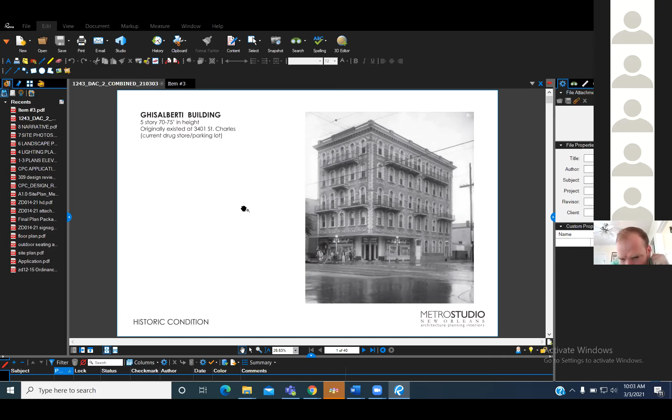We will begin with the presentation of dockets. Item number 2, the reconsideration of Design Review Docket 18420 for a property located at 3401 St. Charles Avenue. We have Renee Duplanche signed up to speak on behalf of this application, and Joseph is the CPC staff member assigned to this case. As I mentioned, Joseph is running a little late, so I'll be sharing the screen, and we will skip the staff presentation—Renee, if you can give us a recap on the comments. You now have 10 minutes to present.

Hey guys, this is Ken Gowland and Renee Duplanche with Metro Studio Architects. We appreciate the comments we received in our initial meeting with DAC. We want to be clear, this project is currently moving through a BZA process for a partial height waiver at the corner. There will be continued development on this project moving forward. As part of that BZA process, we were asked to bring the initial concept design to DAC. The design is different and has been modified to meet ARC requirements. The previous design you reviewed was taller, with a bit more building mass. We held on to the positive aspects of the site plan as discussed in the last presentation.

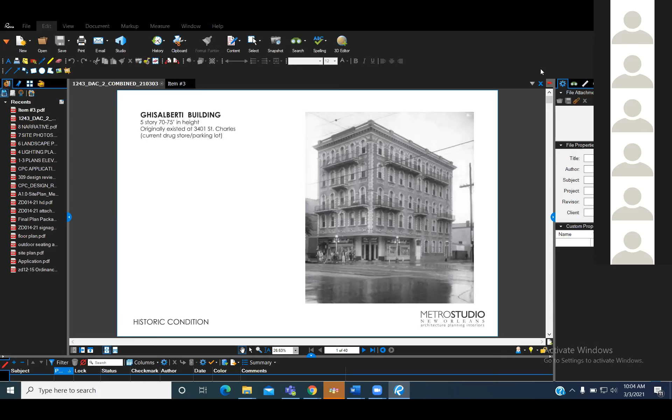So what you see before you now—I think we can skip to page 19 of the site plan. A procedural question: Stephen, this question is for you—this is site plan review only for the DAC, correct? Stephen, are you available? If not, I can answer that question. Okay, Haley, that's fine, that's correct. It's for site plan only, Eleanor, because HDLC has been reviewing the building, correct?

I wanted to add that at the last ARC meeting of the HDLC, the ARC recommended conceptual approval of the proposed design, provided they added ground floor courtyards at the Louisiana Avenue elevation. I just wanted to let the committee know that's where the ARC stood on the site planning of the property. Okay, thank you, Eleanor, for that.

And so Ken, have those ground floor courtyards been added to this drawing, or is that forthcoming? Yeah, because of the timing on the submission, that hasn't occurred, given how the ARC meeting fell with regards to your submission deadlines. So the two areas Eleanor is bringing up are these two insets along Louisiana Avenue where ARC has asked for ground level green space to be incorporated at those conditions. Again, this plan does not reflect that change, because what you have is the same submission that ARC had initially received.

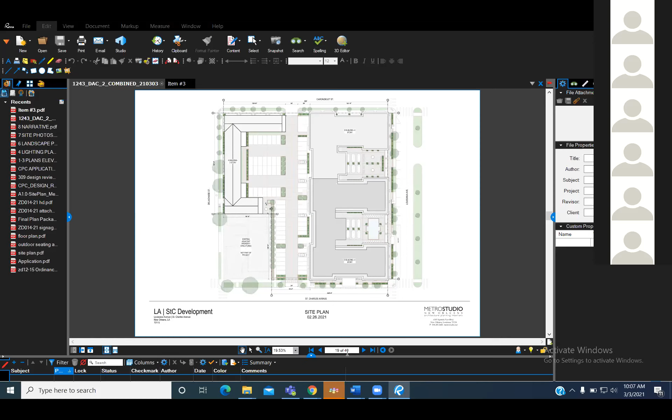Also, if you go to page 29, I think that would be where—so again, that's our existing condition. Sorry, guys, I don't... there. So, page 29.

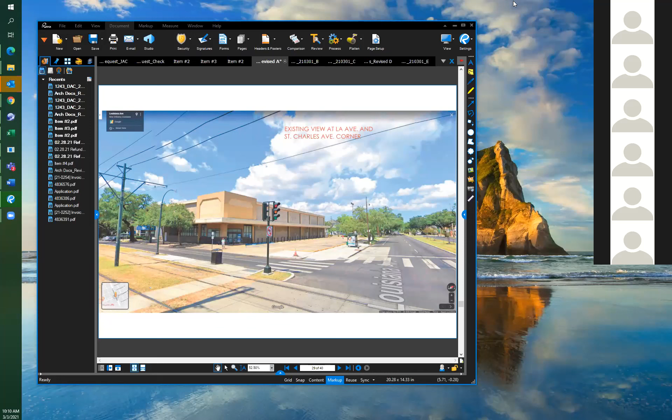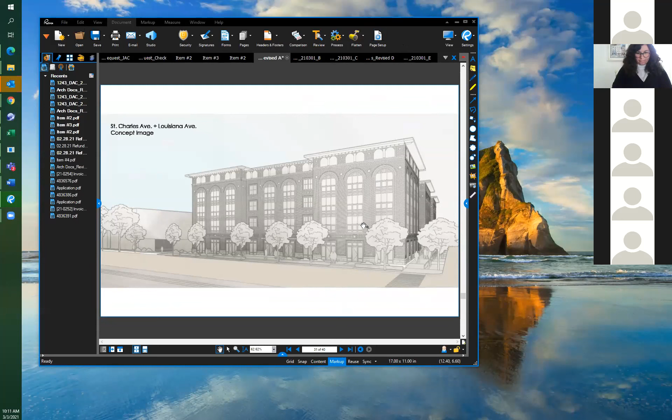Thanks, guys. I just wanted to bring up some other changes in addition to what Eleanor has pointed out. This is our Louisiana St. Charles existing condition. If we scroll to the next page, we can see some of this was the earlier sketch done of the project, a little bit taller, obviously. This was again an earlier concept. ARC had taken some issue with the height, how it was being expressed, and the archways. If we can go forward again, Joseph.

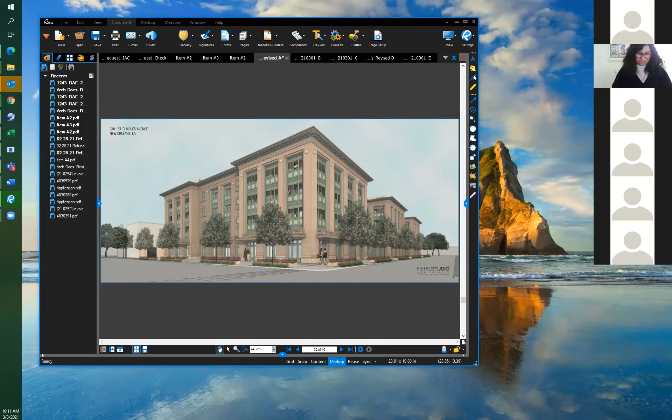This is the revised design as per our last interaction with ARC. As you can see, it's no longer a visible 5-story condition. The 5th floor as per ARC has been set back to reduce any visibility to that upper level. The building now has canopies at all of the ground floor retail conditions, another request from ARC, which we've integrated into the design. The arched openings as part of the facade have been removed for squared off openings as per ARC.

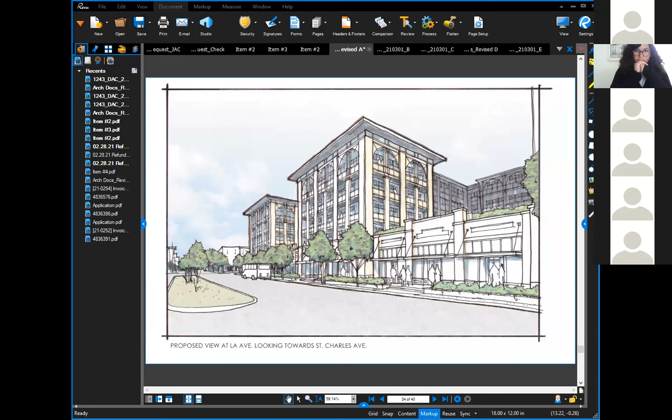We can advance through just to show the progression and the design change. To be clear, guys, the actual site plan, the parking counts, the bike parking, off-street loading, all of those infrastructural components of the original site plan remained exactly how it is. The changes are mainly with the height and the mass of the building. So again, this was the much taller original sketched out design. We can advance through. Again, where we had 5 stories, this is where we landed currently.

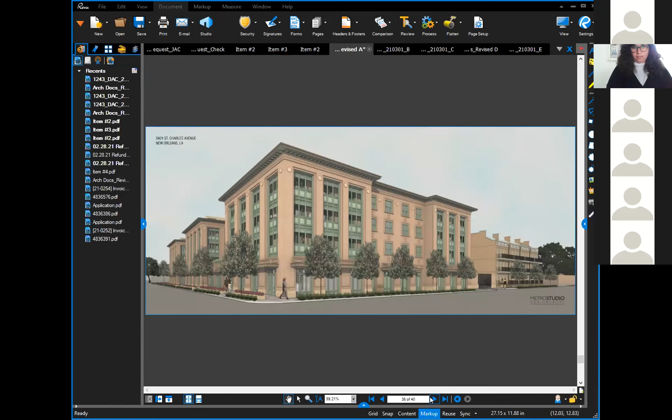This is at Carondelet and Louisiana Avenue. This is no longer a 5-story building. There is no setback 5th floor. The project has been reduced to eliminate the 5th floor at this corner of the site to help us step back into more the neighborhood scale fabric. As you can see in the background, we had our residential building at 3 stories, which is in the neighborhood.

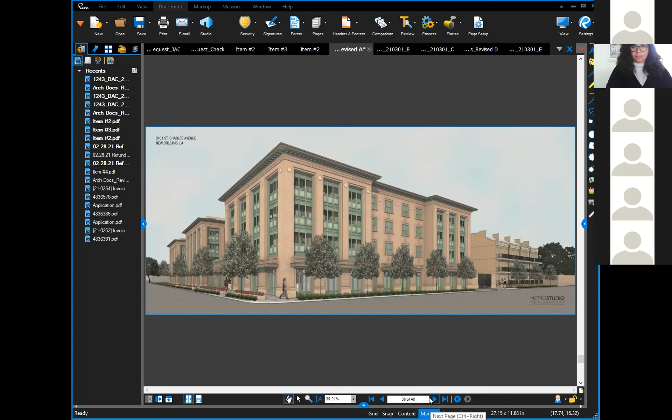We can advance through these slides just to look at that last bit of change. And again, that's existing. This was the previous sketch with the larger building in the background, again a 5-story building in the background. And then we have what we currently have worked through with ARC, which is the 4-story building condition. We did include some conceptual drawings.

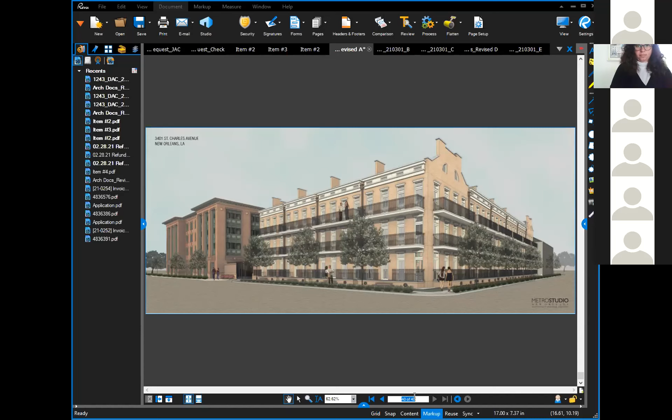I think Mr. Haywood had some questions regarding how we were proposing potentially developing or redoing the right-of-ways. I think we can look at page 20 for those drawings of the St. Charles and Louisiana Avenue frontages. I want to be clear to both DPW and Parks and Parkways, this is just initial conceptual design. There will be civil and landscaping brought into the project. The owner is retaining an arborist to review the existing tree conditions surrounding the site as requested by Parks and Parkways, as they had some concerns that some of the tree material might not be viable.

For our proposed sidewalk plan, we're keeping and integrating the bus stop into the proposed design moving forward. We do have a level change at the sidewalk proposed of approximately 1 foot above the existing adjacent grade condition, which we're defining as top of existing curb, and introducing more landscaping into that right-of-way. Currently, the right-of-way between the property line and the curb is 100% concrete. We're proposing that we reduce the amount of concrete hardscape in the right-of-way, introducing rain garden features and surface level planting, especially around tree conditions where they're constrained right now just with 100% concrete.

We are currently proposing we would like to work with DPW on using a permeable paver installation at the right-of-way conditions, again to increase the permeability of those right-of-ways, and offset, not for the building. I mean, to be clear guys, I think we have an 1,800 cubic foot volume retention requirement. We are currently at over 2,000 cubic feet of retention. This permeable landscaping outside of the property is not contemplated as part of our calculations, so our stormwater retention is wholly within the site as required by Article 23, I believe.

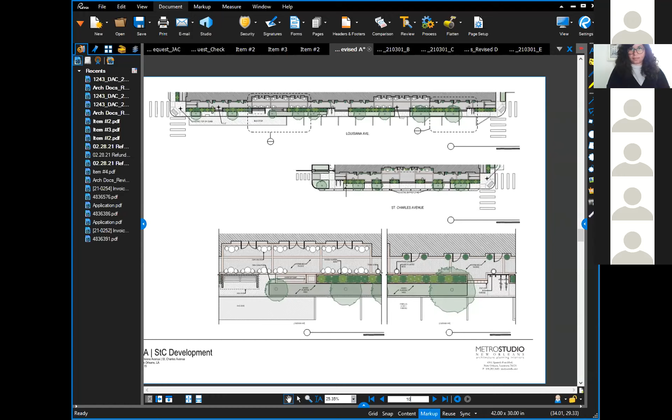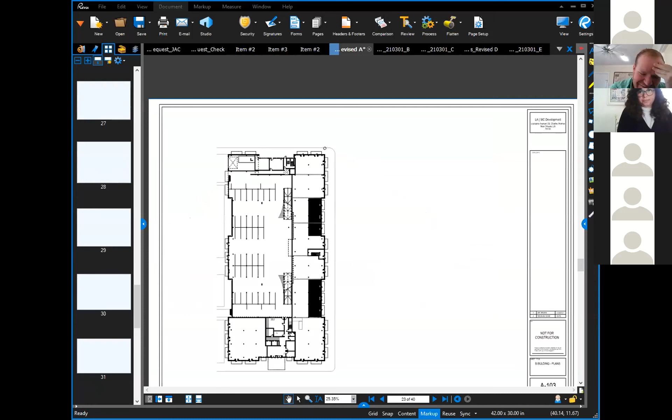Well, I do. So going back to the bus stop issue. The bus stop is still at the corner. Basically, we have to have 8 feet clear, deep from the curb, at the bus stop. That's just the basic transit ADA requirements. So 8 feet is a pretty big chunk of the sidewalk. Generally, that area is going to need to be clear.

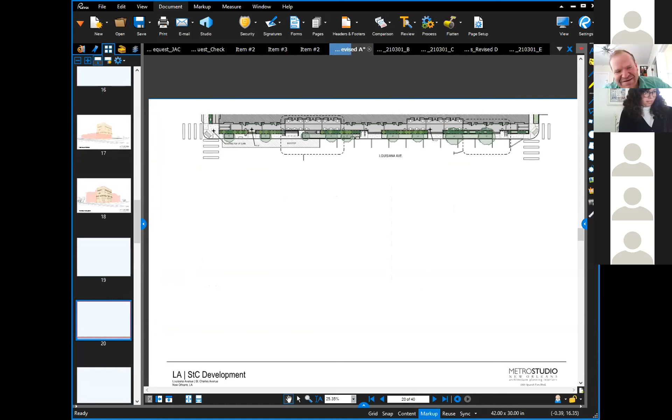Sorry, RTA. I believe, at least on my end, you're cutting in and out, Lewis. Is that just for me? Haley, no, for the past minute, Lewis has been basically frozen. So Lewis, if you can hear us, just know that your comments for the past minute, we don't have a record of. Lewis? I believe he was talking about the RTA. All right, just give me a second. Okay.

So if I could just ask real quick, in line with what the ARC is asking, would the applicant basically be cutting the site plan for the public realm in half, roughly in line with these annotations? I'd say roughly, I don't know exactly the dimensions. I think the courtyard size was around 1,600 square feet that they were looking for at those 2 conditions. I don't know the size of those squares that you've drawn, Joseph, but that's the location.

That's correct, I believe the ARC mentioned 40 feet. They were asking for a 40 by 40 area, which I think that area is wider. And that's why I'm saying, just in terms of square footage, I think it was 1,600 square feet, if I'm doing my math correctly, 40 times 40.

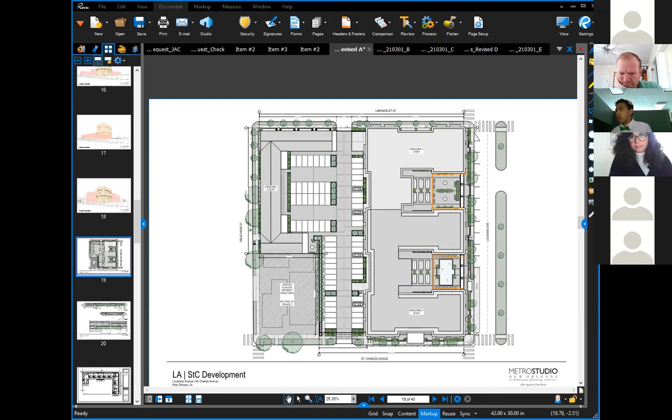I'm assuming Lewis was talking about some of the space requirements for the bus stop. We just want to be clear that we do have a wider right-of-way condition at the bus stop, and the building does step back already at that condition. We're happy to work with Mr. Haywood to address any space requirements specific to the RTA. The owners currently include in their plans the construction of a new bus stop, something that will hopefully provide weather protection for folks waiting and encourage the use of mass transit for tenants of the building. We'd expect some back and forth, not just with DPW but also with RTA on that component as we move into final approval.

Yeah, thanks, I'm back on the phone now. Basically, our bare minimum is 8 feet deep - that's a federal ADA requirement now for transit. It's really 8 by 5, having 8 feet clear at the curb, and that would obviously have to have access to some kind of accessible way to the public right of way from there.

You're basically crowding this area with the trees and landscaping, really constricting that area. Even though that shelter is where it is today, that's not necessarily where the bus stop is - that shelter can be anywhere. The bus stop is where the sign is, basically closer to the corner, I think, but it has to be a certain distance from the parking for the bus to get over. So it really is kind of overly constrained here. I don't see this version working anywhere close to what it is.

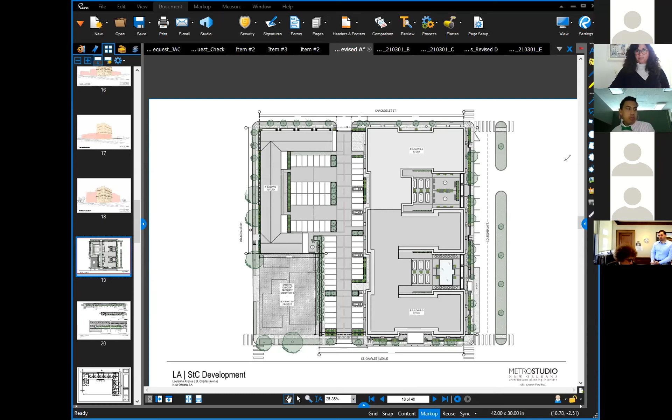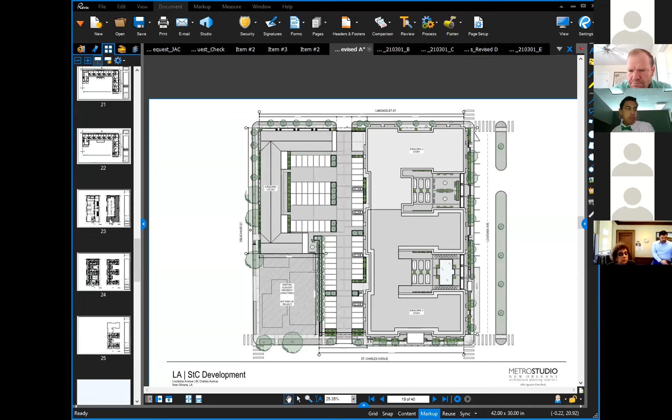Yeah, and Lewis, I think that would be something we'd want to understand - what the options are in terms of what DPW allows. We've seen DPW do a lot of strategic curb modulations in recent improvements, especially regarding busing and bike lane installation on existing streets. So we welcome the fact that it doesn't necessarily have to go in the exact spot, and if there's a better location to work on with you guys, just to be clear - it's 8 feet parallel to the curb and 5 feet perpendicular. Am I interpreting your dimensions correctly?

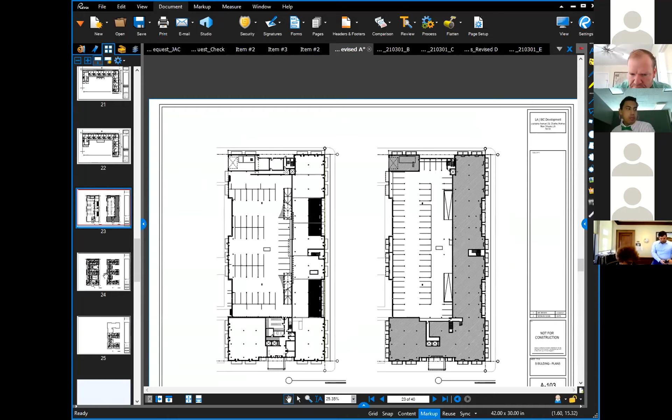No, it's the opposite - you need 8 feet from the curb back toward the property line. Okay, and again guys, we're sort of at conceptual level with the right of ways. Lewis, there's space available - obviously if we look at how we alter the planters and the sidewalk width, I think the real estate is there to accommodate it. But again, we'd want to work through some very specific conditions.

If we look at page 20, I think that's the best representation. If we zoom into the bottom corner, we can all focus on the areas Mr. Haywood is talking about. So we have our bus stop, and like he's saying, we have a planter at that condition, and a ramp condition going back up. So again, this can be developed more in line with the parameters we're hearing today.

Okay, and then just the basic concept for the bike racks looks a little suspect - just the way they're perpendicular to the curb, and I'm a little concerned about blocking all this landscaping, really making the on-street parking pretty inaccessible. So even having a small shelf behind the curb would really be helpful, but the way you have the raised sidewalk and trees, it just makes that pretty difficult. We've tried to maximize that in previous developments with this type of situation, so that we're not completely orphaning things in a high demand area, which I think this will be for on-street parking. So we'd like to have some hardscape for people to be able to get out of the cars.

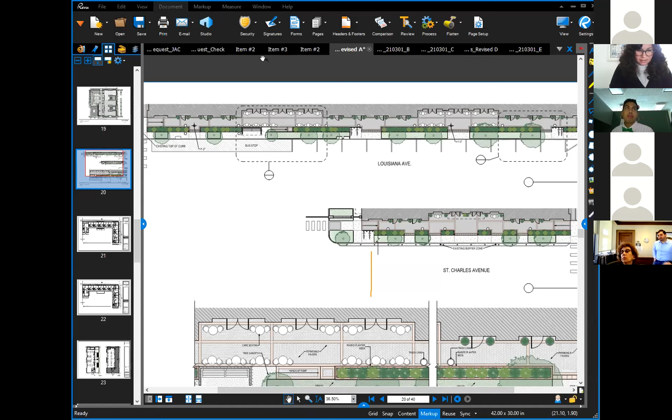All right, so that sounds like the end of the committee discussion. If there are no further comments, we'll move on to the third item on today's agenda, which is Design Review Docket 2021 for a property located at 2121 Chartres Street. We have Walter Ainen signed up to speak on behalf of the application, and Joanna is the CPC staff member assigned to the case. As a reminder, following the staff presentation, the applicant will have 10 minutes to present.

Before you go, Walter, Joanna, do you have any comments? I'll just orient us. This is a proposal for the adaptive reuse of the vacant bottling factory and warehouses on Chartres Street at Elysian Fields. They're proposing a 49 suite hotel at this site.

This proposal is coming to DAC because it's in an EC enhancement corridor with over 100 feet of frontage. The site is in a local full control historic district, so this review is for the site plan only.

Okay, thanks, Joanna. Walter, you now have 10 minutes to present. Okay, let me try to get my screen up. We will have Joseph controlling the graphics, so if you just point him to a page number.

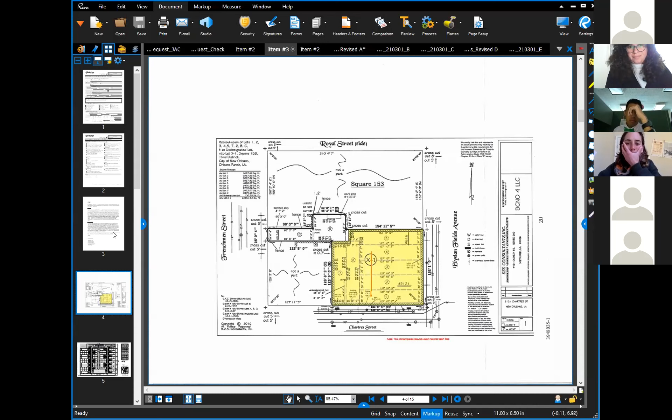The slide we're looking at now is just the cluster of lots that comprise the property. It's on the corner of Chartres and Elysian. Let's go to some of the aerial shots that give you an idea of the character of the building, slides 13, 14, 15 at the end. It's a cluster, a historic building at the corner, the old Dr. Nut Bottle Factory, and then some later buildings, mostly warehouse and storage, that kind of turn the corner.

Go to some of the conceptual plans, ground floor plan, slide 5. Yeah, we'll start with that. That's the ground floor. We have basically two double loaded corridors, apartment style suites, some exterior space in the middle of the site, and along the back there's a one-story brick warehouse along the back of the building. We're going to take the roof off of that and have a courtyard space, and there'll be a central exterior space that goes down the middle. The second floor is the same.

You could just go through them. So that's second, and this is the penthouse level. We want to do a row of penthouses on the roof. Let's go through it and go to the elevations. This is just a close-up of furniture detail, roof plan.

Elevation. So what we're trying to do is keep the same character of the old bottle factory, but modernized. Basically a simple stucco exterior wall that will be at the same parapet height of the historic building, and it'll turn the corner and go up, and the little arched bays will have the same proportions and spacing. Those will turn and go up Elysian. The stucco will match the historic, and then within the bays we're going to have something more contemporary, like a more contemporary metal and glass storefront.